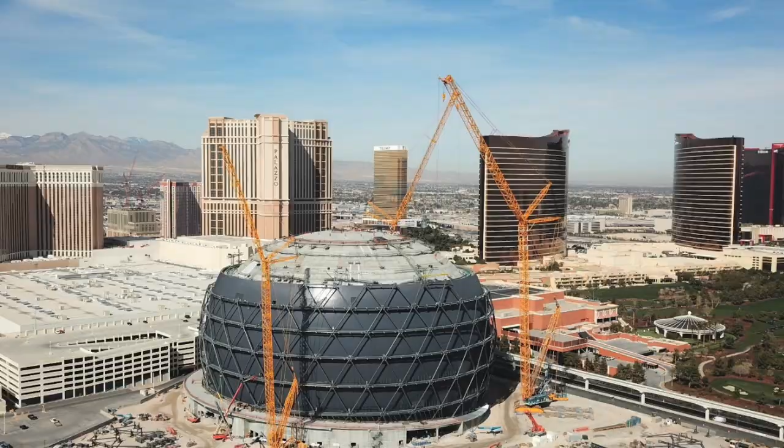How would you describe the sphere to another engineer who's unfamiliar with the project? You're just trying to give them engineer speak for what it is and what's special about this. It should be no surprise that a geodesic sphere is a very efficient structure. It's one of the most efficient, well, it is the most efficient shape as far as we're concerned in our perceivable notion of the universe.

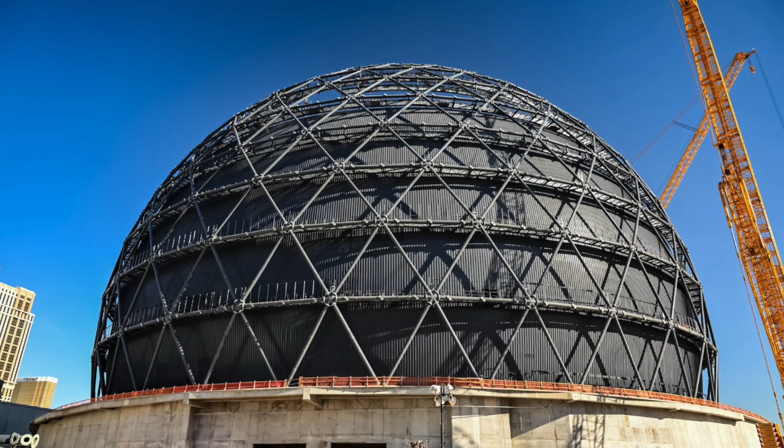Everything that's a sphere is a sphere for a reason. Planets are spherical for a reason. Fruits are spherical for a reason. It's just the natural shape that produces the most efficient structure. It's how nature evolved from some sort of spherical form, even at the cellular level. That's the easy part. Getting it structured wasn't even difficult.

We did toy around with different geometric configurations. We used traditional geodesic sphere patterns dating back to the Buckminster Fuller sphere models, which were fine. The only thing about those models is they don't produce repetition. They do in the sense that there are identical nodes, but their forces are totally different because one may be near the base, one may be near the top, since it's purely icosahedron based.

So we landed on this geodesic space grid, which is a series of equally spaced latitudes that produce identical rings. And then they're just literally cut with diagonals, and the diagonals cut out where there's low utilization. So as you get to the top, it becomes very congested. So members are just simply truncated away where they're not needed anymore. It's as simple as a topological analysis gets because it's a sphere and you're just eliminating members where they don't do anything.

The venue structure is totally isolated from it. So as you can imagine, that's an exterior LED screen that wants to breathe without restriction. Temperature swings in Las Vegas are quite dramatic. Because it's a desert climate, you're going to tend to see very high temperatures during the day because of the sunlight and the mass of the sand. And then at night, you're going to see very low temperatures because the mass is just going to lose the temperature. There's nothing insulating it. So you could have up to a 100-degree temperature swing.

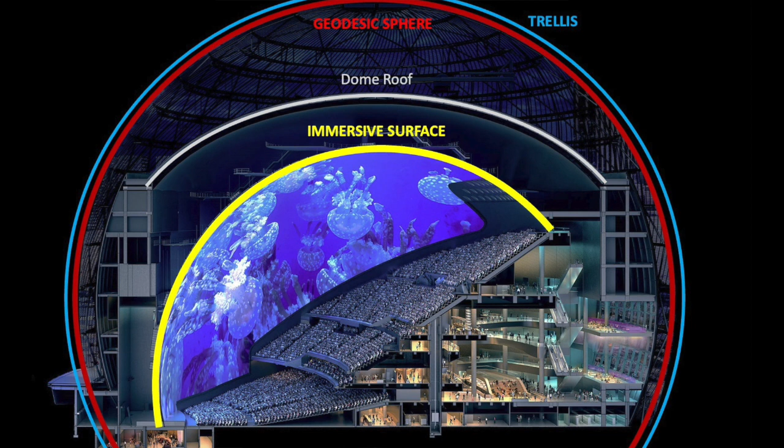First layer being the dome roof. That's the one that has the highest tolerance because it's this large span, 400 feet, supporting all this concrete and all these roof activities and so on and so forth. So that generally had a 3-inch tolerance. We expected that to be within 3 inches by the time it was completed construction. When it was built, it actually was a lot better.

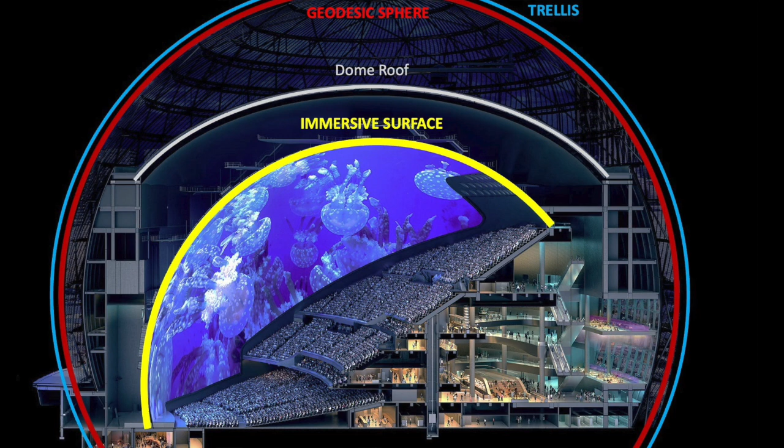W&W did a fantastic job fabricating and erecting it, and we had some great steel detailers working for them that got it to within 1 inch of where it was supposed to be. Not only that, but it had about 1,200 members in it, and they didn't weld a single one. They were all bolted and fit together.

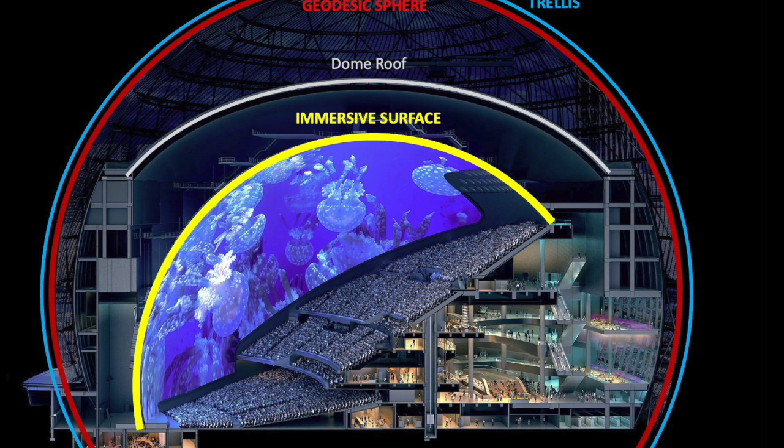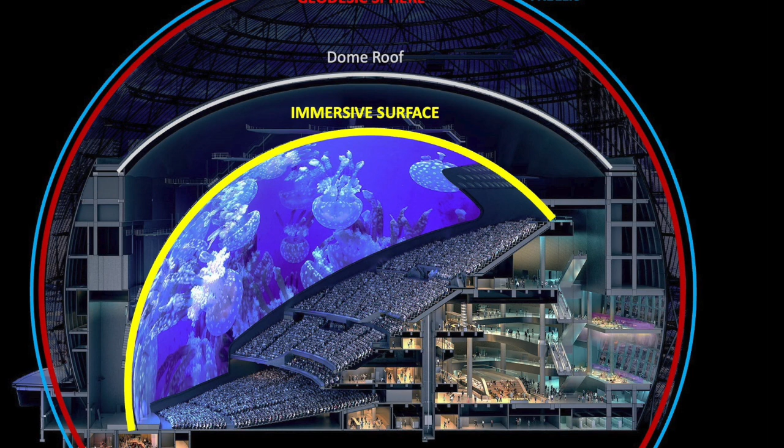It was also cambered. So getting that thing to actually deflect like it was supposed to and get all those bolt holes to align and all those members to be happy and snug was quite an accomplishment. So we were already well ahead of where we thought we were with that, which is fine. We had planned to be 3 inches, we were 1 inch.

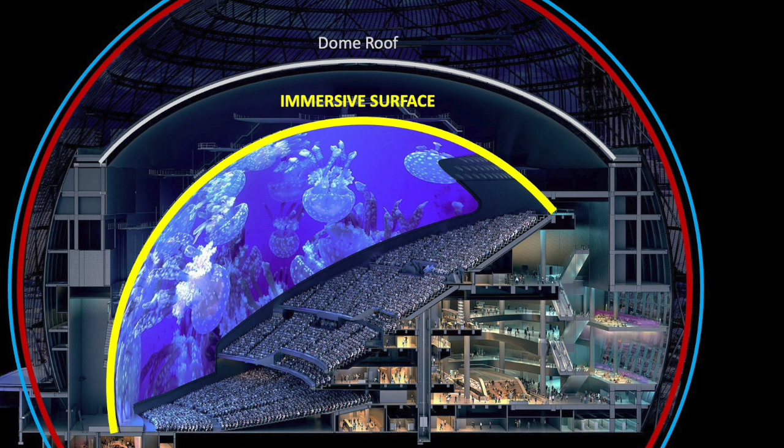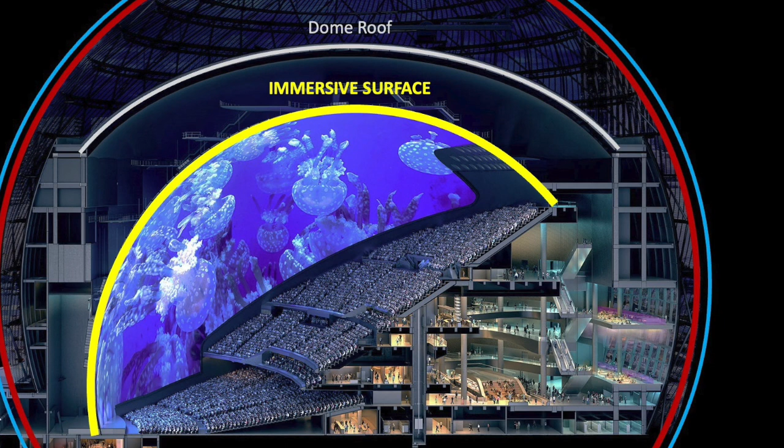The next layer of the onion was this grillage system. Now it looks like just something hanging from the dome roof, but it's a lot more than that. It bridges two geometries together. The dome roof is at the center of the sphere, but the media plane is slightly offset; if you're looking at the seating bowl, the center of the media plane is closer to the seating bowl. So it's actually offset. So you can imagine trying to hang something with one coordinate system and center point from another one is quite challenging geometrically. So we use the grillage to marry the two geometries.

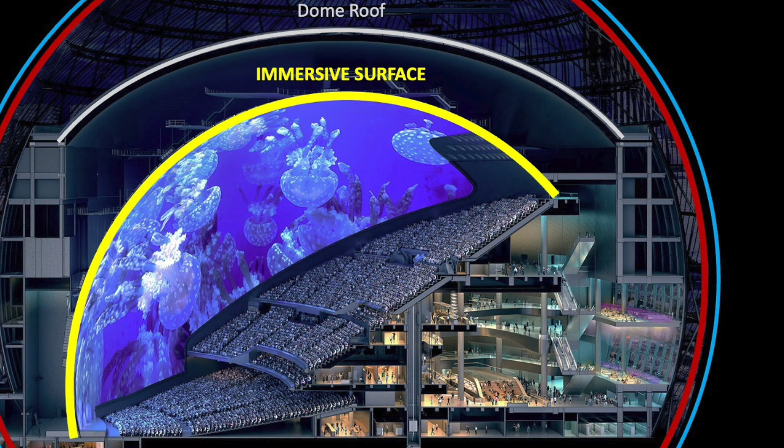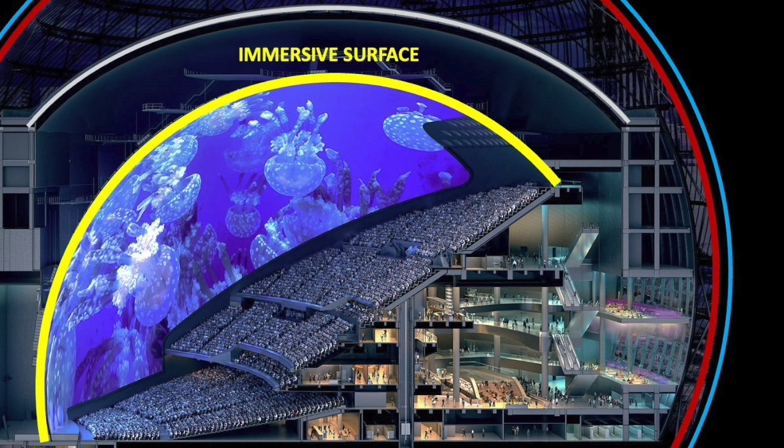Grillage is an illustrative catwalk system. It provides access to rigging points. It provides access to every tile on the media plane to an extent. There's a ladder system to get you to the tile, but the catwalk's there to get you to the ladder system. It also hangs from the dome roof and hangs the media plane. So that gets us to our 1 inch tolerance, which frankly we were already at. So when the two of them were complete, we got exactly to where we wanted it to be for the media plane.

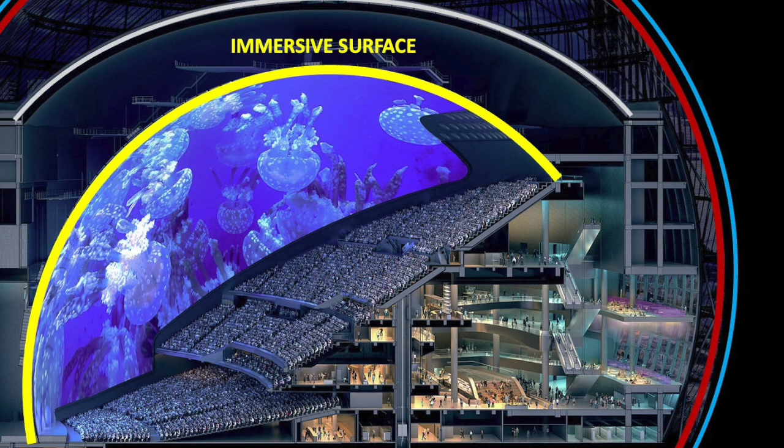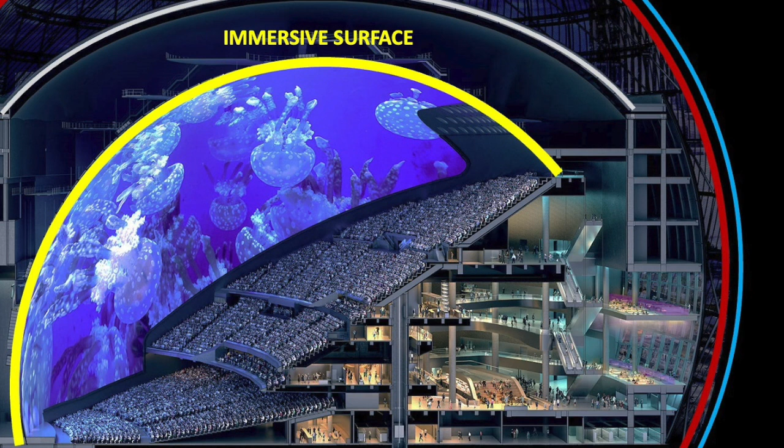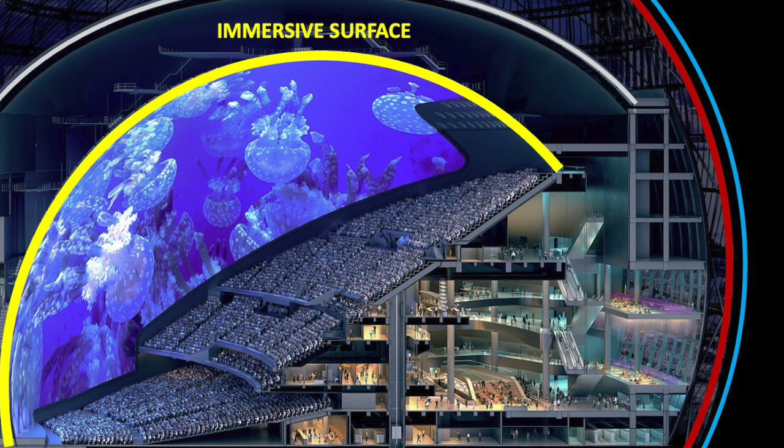The next layer of the onion is a primary structural system hung from the grillage. That system was supposed to get us to within a 1/2 inch tolerance, and it did. We had little pancake jacks at each hanger that we were able to adjust elevations before locking them off. And that got us to our 1/2 inch tolerance. Then there was another layer called the secondary. That secondary had clips attached to the media plane that allowed adjustment up to a 1/4 inch.

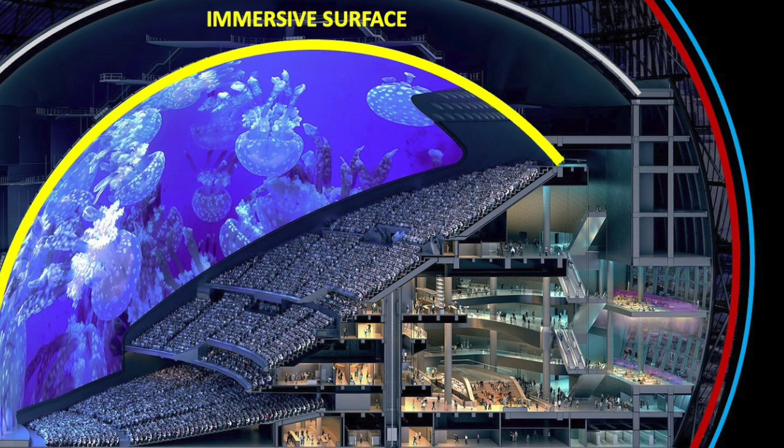And then finally the tiles came in, and they have basically an 1/8 inch tolerance. When you factor in deflection and everything, you're going to use up to the 1/4 inch that you're allowed to have differential from tile to tile. Otherwise, you get lines and things like that and distortions in the picture, which nobody wants. So by the time we layered that all together, we finally got to where we needed to be.

Now the key was setting each of the 64,000 tiles, which was a steep learning curve, but eventually there was a good rhythm, and they were able to complete it pretty much in around 6 months. And then you flick the lights on, you turn the screen on, and you hope for the best. There's obviously a lot of programming involved.

I'd say along the way they were programming it, but there was another 3 months of programming at the very end just to make sure that systems were all communicating with each other properly, and you weren't getting weird colors on certain tiles that you weren't expecting. And then at that point in time, you decide that you're ready to open, and you open the doors and let the people come in and enjoy it.

This was launched in 2 stages. One, the outside was turned on 4th of July of this year, just to wow everyone and finally tell Las Vegas what it is we were building.

I think a lot of Uber drivers thought that we were building a Death Star. They would always ask me what it is we were building, and it wasn't public knowledge yet, so I had to keep it a secret. And then they turned on the outside, and everybody was like, wow, that's neat. Everybody loved the outside, but they still had no idea what was going on inside.

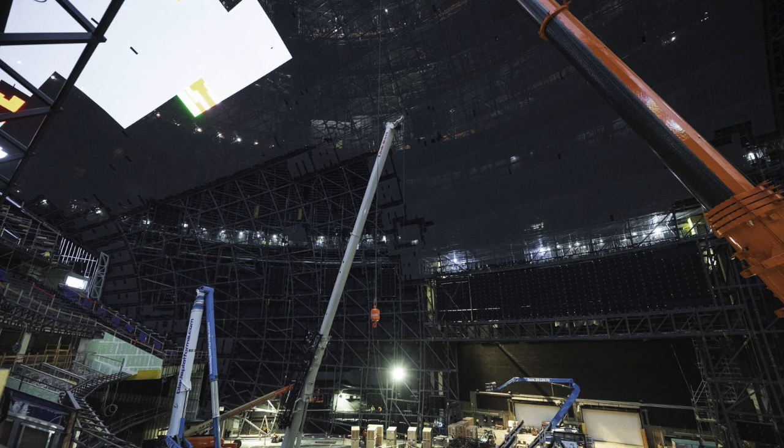And then the last system—I don't want to call any of them more important than the other—but the seating and the floor decks are gravity only. So you've got composite construction where we had steel and cast-in-place concrete. In this case, we used more or less pan joist with one-way slabs for the concrete construction, and then the rakers are supporting precast, which is pinned. So it's definitely gravity only, with a series of diaphragms and everything to collect forces out of it and get it to those rings that connect to the elevator cores. So that's generally why it was divided into distinct parts.

You don't want to attach it to two different parts of that distinct structure. That's why it was hung from the dome roof, because if you started to attach it to the venue too much, you'd get weird, not only load distributions and unintended load paths, but distortions in the deflected shape, which is a huge no-no. That's where your relative tolerance will get blown out of the water. So it's more or less completely hung from the dome roof because we know how the dome roof reacts. And on top of that, we made sure we knew how that reacts by putting it on those radial sliders and not getting this unintended restraint from the columns.

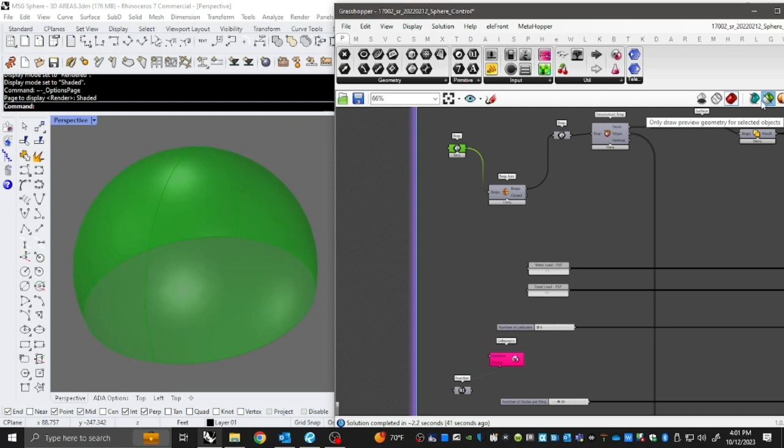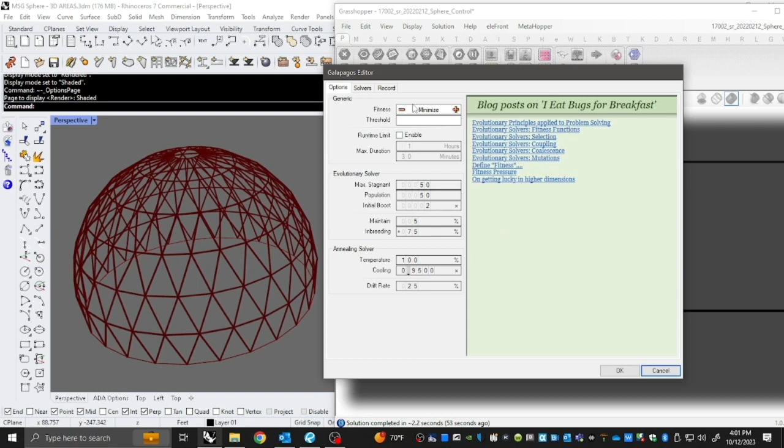In general, we started off simple and parametric. So the size and the number of diagonals and things like that was all up for discussion, and we weren't told it had to be 32 diagonals. It ended up being 32 diagonals because it was honestly the most efficient. It also produced member lengths of 50 feet and less, which meant they could be trucked pretty traditionally, which was a very important consideration logistically, since they were all pipe and being imported to the port of LA and then driven over. Making sure they were more standard trucking, as opposed to wide load or long load trucking, was an important consideration. So we landed on 32.

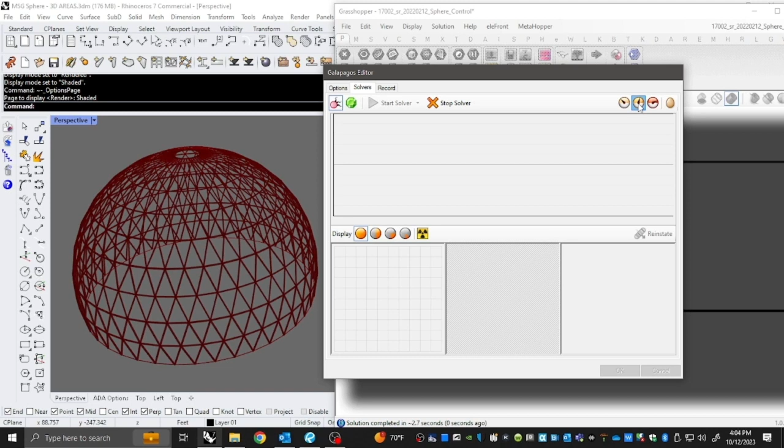We matched the venue columns because honestly, you don't want to run into an exosphere diagonal and then run into a building column - you want to flow right through. So the venue ended up with 32 columns. That was our given, we had a size for it. We let the software iterate millions of times on how many rings we wanted. In general, we landed on 14 rings with 64 diagonals, 32 pairs, as being the most efficient for that size.

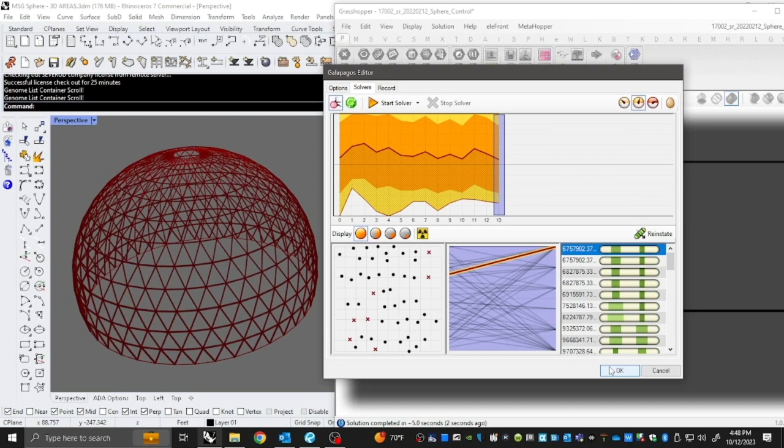From there, that analysis was all done inside of Rhino, Grasshopper being the algorithmic parametric control, and Karamba being the analytical software. We like Karamba because it has a very good Lagrange multiplier optimization, which our CEO - he has his own program that does the same type of thing, it's AutoCAD based, and he developed it in C# for the Denver airport back in the 90s. We used Rhino because Populous was using Rhino, and we just wanted to take their models and be able to structure them and get optimized results fairly rapidly. So it made sense to go with that workflow as opposed to the more traditional AutoCAD workflow.

And then we had tried a few different analysis programs, but Karamba was matching the type of Lagrange multiplier optimization that our office was traditionally doing. So that would run - you'd let it run overnight. It would probably design 100,000 spheres for you with whatever loading, whatever size, so on and so forth, and you would eventually get an optimized result.

That's good for SD, but you're going to start to layer complexity. Like, we were keen on buckling. Now, Karamba did check - at the time, Karamba didn't check buckling or nonlinearity, or have very good second order effects, but since then, like most things, they're improving their software. And with some of the updates, we tried the buckling and started to notice that it's fairly good alignment with SAP.